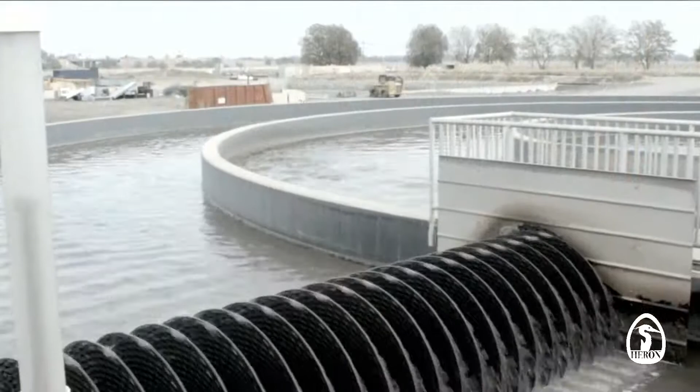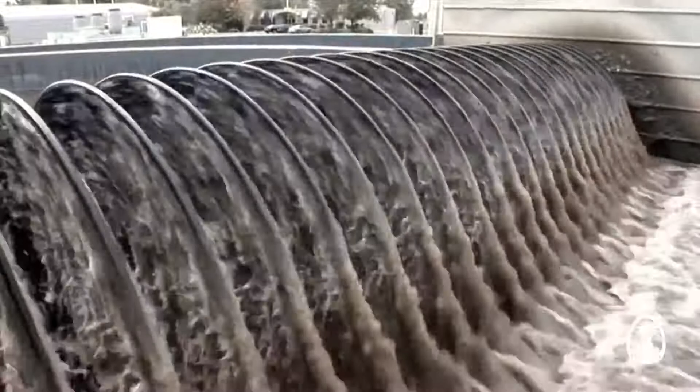What's exciting now about wastewater in the 21st century is that we're now considering it a resource. In the 20th century, it was considered a waste, and we developed treatment processes to incrementally deal with various constituents. But in the 21st century, it's become a resource. Wastewater is a renewable, recoverable source of potable water, energy, and resources. That opens up whole new vistas in our thinking about how to manage wastewater.

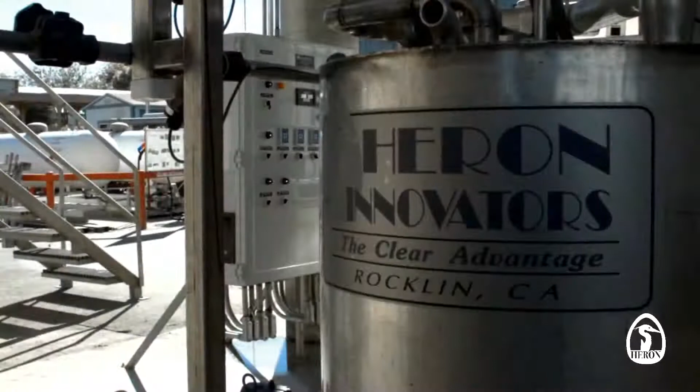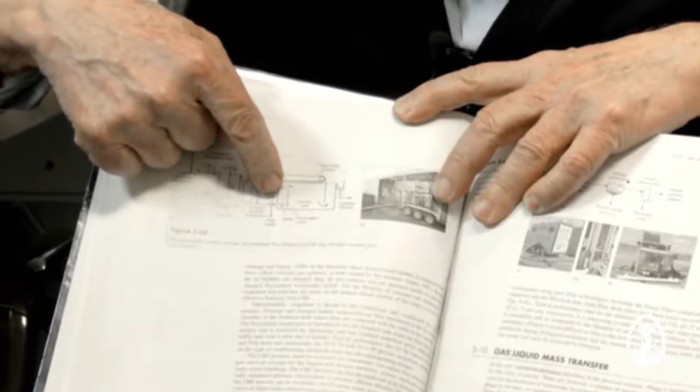Charge bubble flotation is equivalent to Heron Innovators' suspended air flotation unit. The best way to explain it is from a picture in one of my textbooks, and I'm pleased to say the 5th edition is now out. What's exciting about this is I've been able to include alternative kinds of treatment processes, including the charge bubble flotation unit. I think what Heron Innovators has done is innovate around the process.

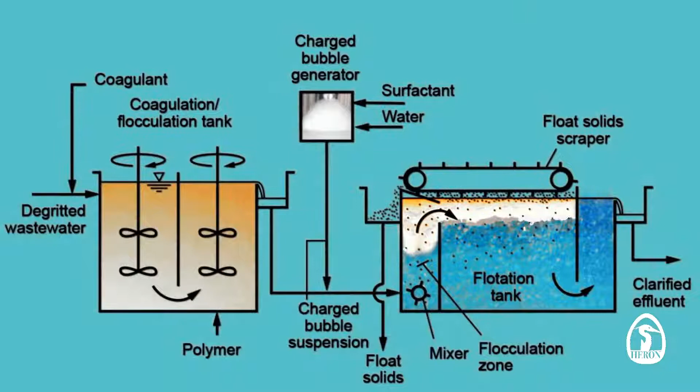One of the exciting possibilities is to think about alternative treatment process flow diagrams in which charge bubble flotation is used to precondition the wastewater before you do other types of treatment. The concept is that instead of treating wastewater the way it comes, we would modify the characteristics of the wastewater to enhance subsequent treatment.

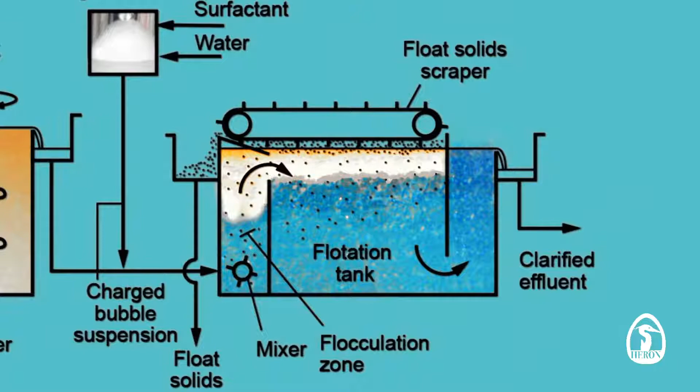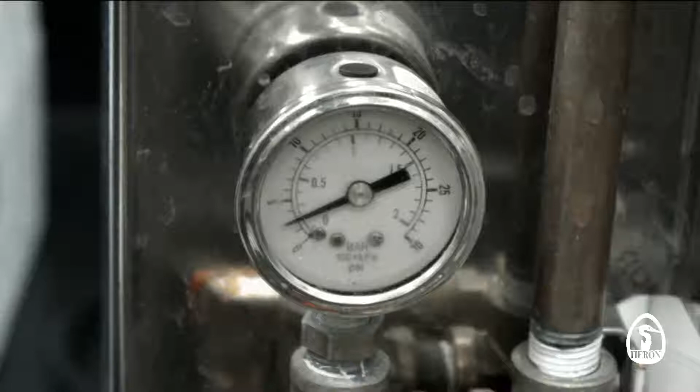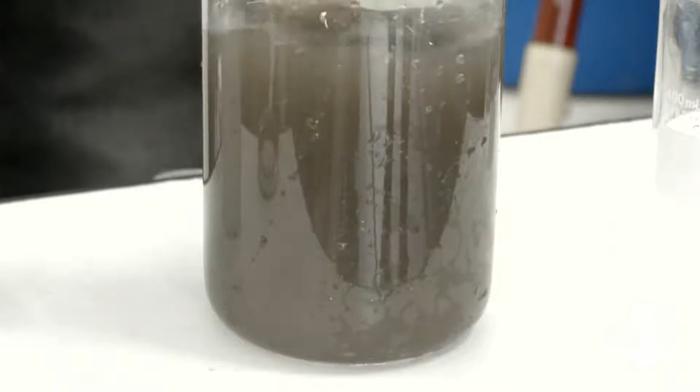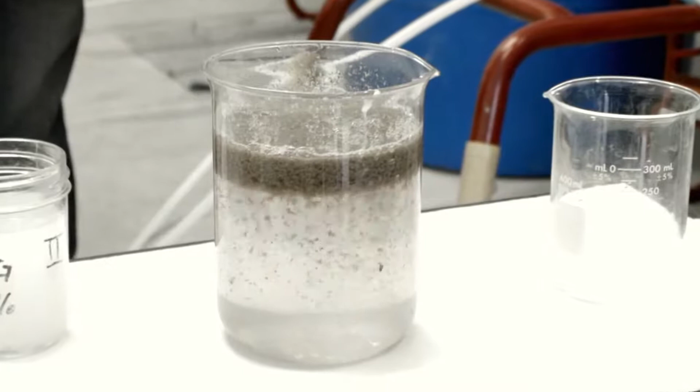We have conducted a couple of experiments. We take raw effluent and we flocculate it and condition it. Simultaneously, we generate microbubbles to which we've added a surfactant. We then mix the microbubbles that are covered with this surfactant with the flocculated wastewater. At that point, the bubbles rise to the surface carrying suspended material that they've attached to. The thickened material is removed and the underflow is the clear liquid that is then subject to additional treatment.

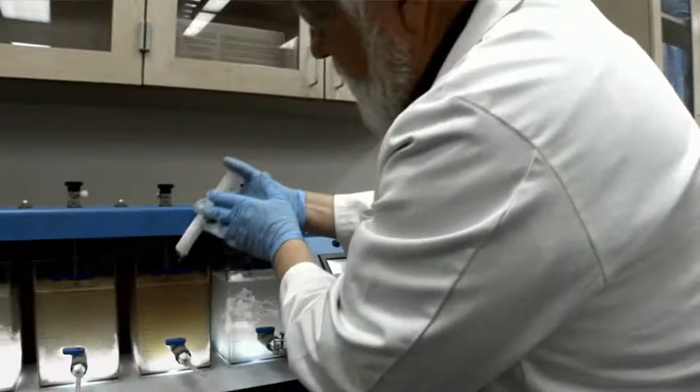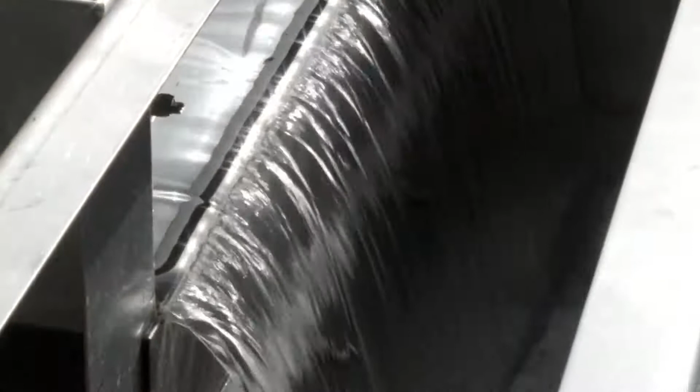This is very promising because it allows us to work over a wide range of flow rates and concentrations and achieve a uniform effluent. The interesting thing with CBF, based on our experiments, is that you also remove organic matter. As you continue to remove both suspended solids and organic matter, you get a waste that is very low in organic matter, and you can think about different types of treatment processes.

In addition, you can take the material that you've removed and use it in an anaerobic digester to produce energy. So there are a number of possibilities here, but I think that it opens up new avenues to think about secondary treatment.

So the earlier talk was about water reclamation, and that was a big deal, right? It's like we can take primary water, we can get the materials out of there, we can get the energy out of the solids, and so on and so forth. He's a huge proponent of ours, and we've worked well with him for many years. We appreciate him talking on our behalf.

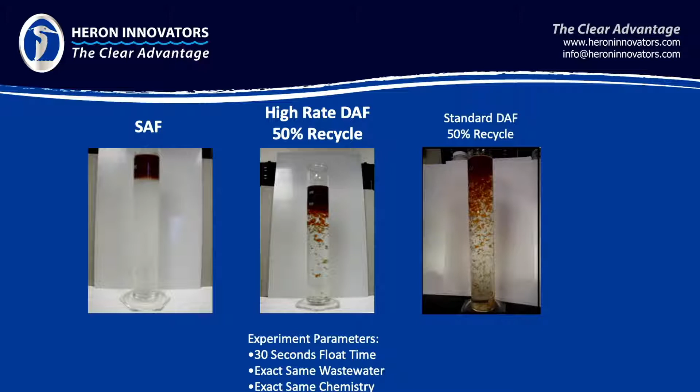You see that? Oh, they can't hear me right now.

So they can see that rise rate and how big those particles puffed up and how stable that float is. That's a testament to how well our air is used, because of those surface tension advantages I've talked about previously, how much air gets on the particle and how fast that goes up.

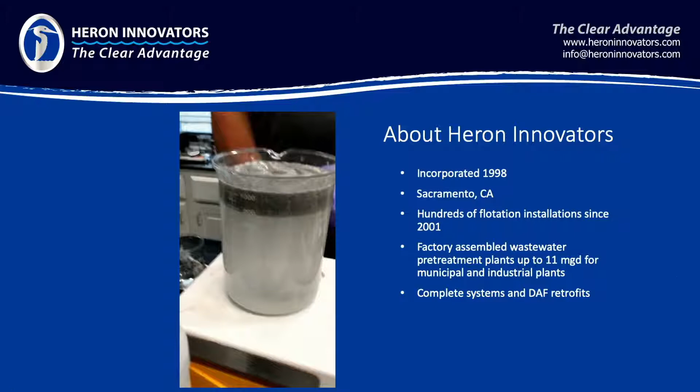So I'm going to move on. I kind of set this up for a host of eventualities, but I'll move on here. Well, let's talk about this really quick. This is our floc mixer, and there's a video on that thing. Let's get that on so you get a nice rendition of it.

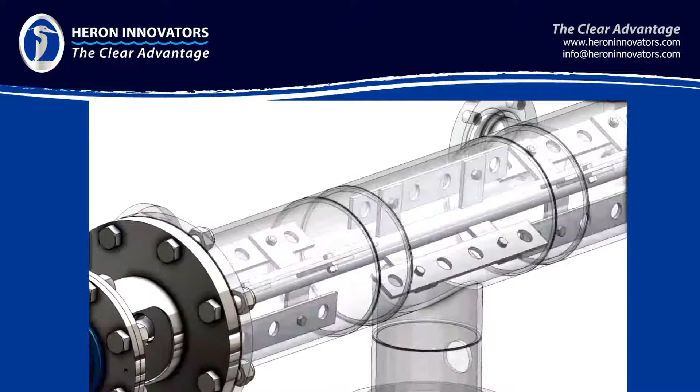So this is on the outside of our float cells, and it's incorporated into the technology. It works best in our float cell, but we can use it in a lot of system retrofits for existing DAFs. Unlike a DAF, where the air is mixed easily because there's so much water carrying it, in our case we're talking about the equivalent recycle of like 1%, and I need to mix it rapidly, which is why we need this mixer. It's the same thing we incorporate into a DAF retrofit or a DAF conversion to SAF.

We get a lot of the same advantages, maybe not quite as good as we can get on our own float cells, but it's pretty impressive—some multiple of the original design, usually 4 or 5, as much as 10 sometimes.

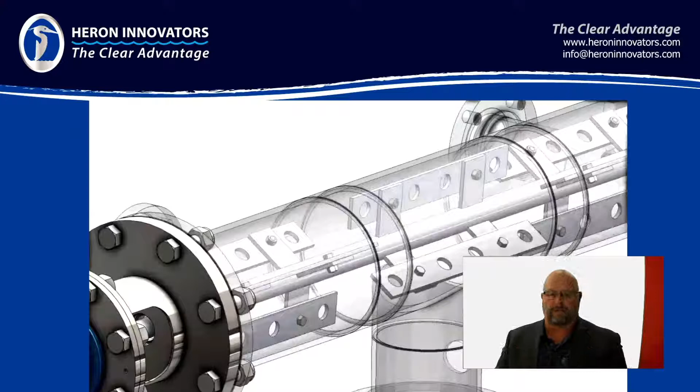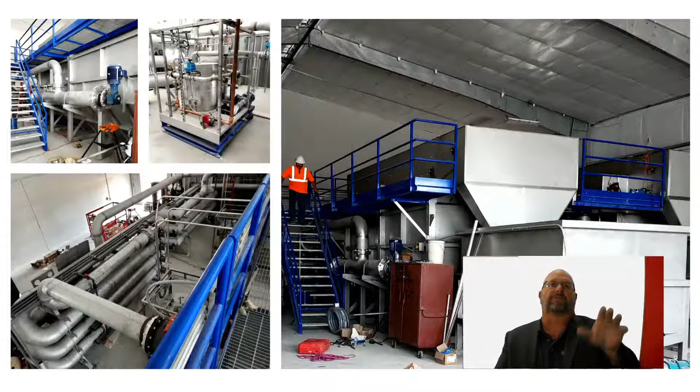This is an actual floc mixer that was being manufactured for one of our clients, and this is an actual installation where you can see the floc mixer on the top left. Let's see if I can reach that thing—right here, can you see that? And on the right is our SAF generator, which is our secret sauce.

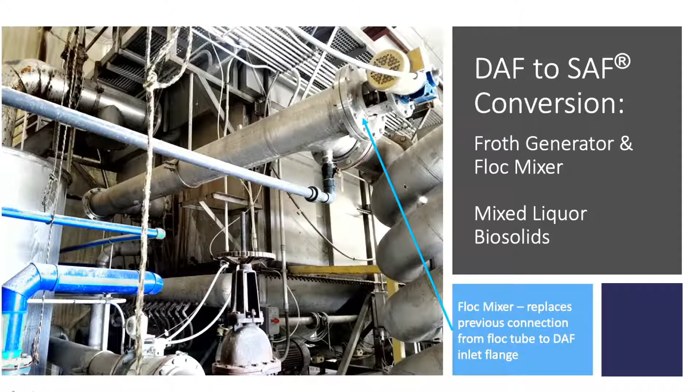This is the floc tube on an installation in Southwest City. This has got a good story. I'm having trouble with the computer here, but right here you can see there's a control cabinet for the froth generator that was utilizing this retrofit. On the top up there is the floc mixer—you can kind of see it with a motor hanging off to the right side of it.

So the water comes out of that floc tube, enters through the floc mixer—what we call the clear mixer—and goes into the float cell. All the froth is fed in; you can actually see the line if you look carefully, but it's all fed on the inlet of that mixer before it goes in. Then the froth and conditioned water continue to be mixed going through the tube all the way to the inlet of the DAF.

This DAF here was kind of challenged. They had not only a mixed liquor they were feeding from an MBBR, but they were also trying to feed the settled solids or waste activated sludge from a downstream SBR back to this fairly large DAF, which was actually spec'd for 2,500 gallons a minute. They were barely getting 1,250 gallons a minute, and just about any time they introduced any of that downstream waste activated sludge, they lost the process.

For years they were trying to manage that and had convinced themselves they had to go buy a new piece of equipment. Well, they met us—Simmons met us. You saw that jar test I showed you earlier, that came from Simmons, and they put this in. Andy there, in the background in the black shirt, will tell you that before we even got up the stairs, this was working, and they're tripling the solids loading today, nowhere near capacity.

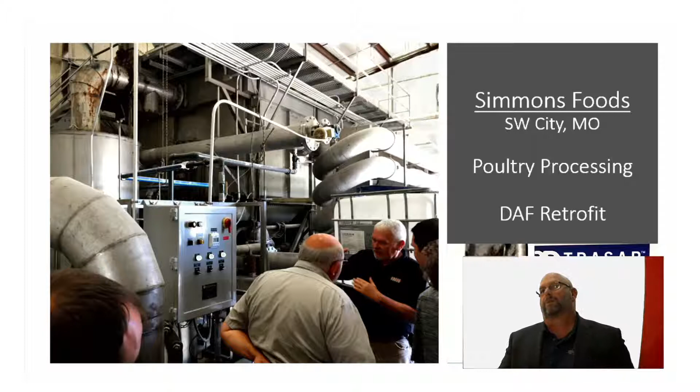It's about 3 times what they were able to get before, and they still have all kinds of capacity available.

The next slide shows a little video down on the bottom right. I'll run this so you can see the clarity of the water. That's actually a reading off the turbidimeter, showing a turbidity of about 0.1. You can see the clarity of that water - it's very clear, very low turbidity. I don't know that they're always at 0.1, but they're always way down in turbidity, and they've still got all kinds of capacity left in that operation today.

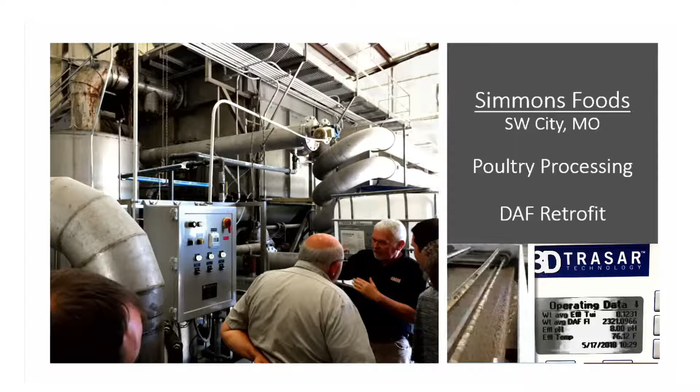I remember the vice president of engineering, after we put our first installation in at another plant, kept coming back to us saying, 'but you said you could do this on this other one,' almost like a dare. They couldn't be happier today.

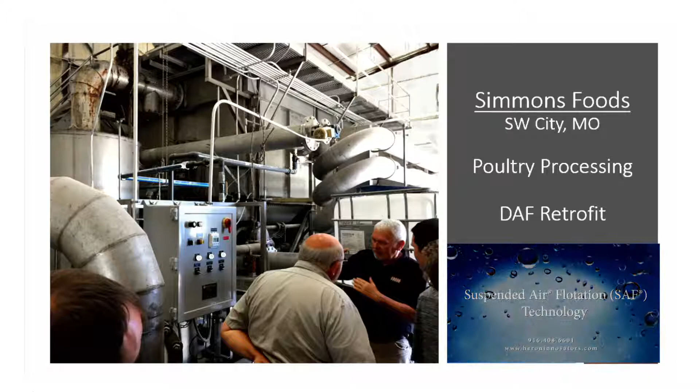All right, I need to get to the next slide. That one we just saw, so we're going to move on.

This is also an industrial setting - this is poultry, and these are large units. There's a good story to go with this.

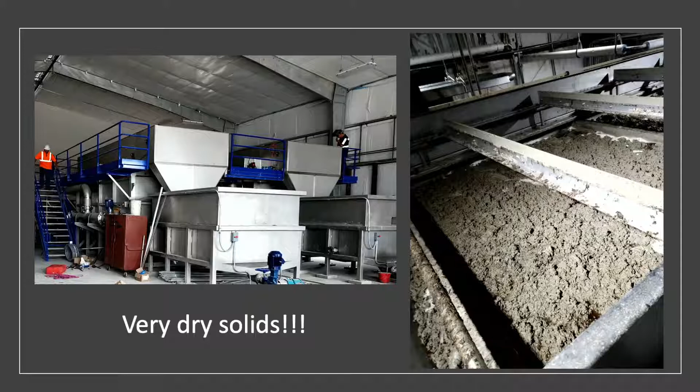They're making great water. The original intent was to come into the primary unit, go into one of our SAFs, then from that SAF go to a biological reactor, and then have the secondary SAF remove the biomass before it discharged to the city.

For months on startup, they never actually ran the biological process - they figured out they could meet their numbers just by going into the 1 million gallon, 1 day retention EQ tank. They ran like that for about 6 months, never turning on the aerators underneath. Well, what ended up happening is the bottom started filling up with solids. So in an interesting note, one day they turned the air on and threw a bunch of solids into solution that would have accumulated on the bottom.

At one point they were running that 140 square foot cell at 2,400 gallons a minute, at 36 pounds per hour per square foot loading.

It was an amazing performance, and the operator, Andy, who's the chief operator out there, said, 'we would go harder, but the pumps can't put out any more - I know this can do at least another 10-20%,' because the water was still crystal clear. So we were easily over 2,800 gallons a minute, or 20 gallons per minute per square foot loading, in that water.

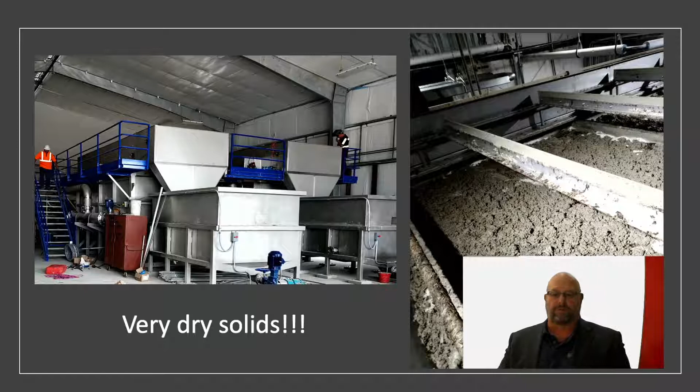Then we do a lot in solids thickening, both industrial and municipal.

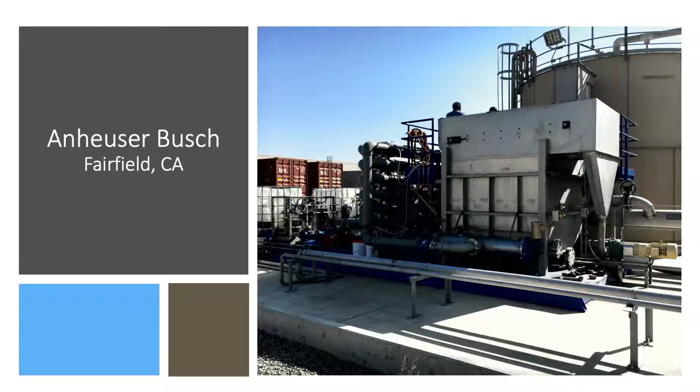This is one of our installations that was dealing with anaerobic digested sludge. We were told we were the best performing DAF in North America. We were in a world where everyone was hoping for 70% removal - we averaged 98% removal consistently. And that 1 million gallon a day unit, with everything on it - all the day tanks and all the working tanks - is only 28 feet long and 10 feet wide.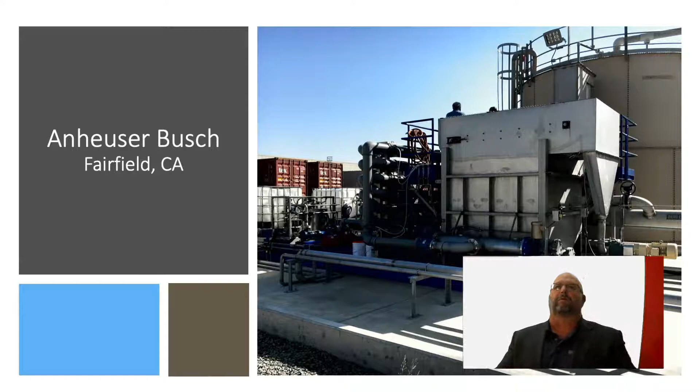Another example - we had a trailer up in Minnesota treating, again, anaerobic sludge, and that's just recently. We were competing head-to-head with a DAF competitor, and we were achieving all those same results I've been talking about earlier. We went as high as 46 pounds per hour per square foot loading, almost always above 99% removal, at about half the chemistry of the competing technology.

Most of those parameters, but the loading rate was really a significant parameter that we excelled on, with the fact that we were able to do it at a fraction of the polymer loading that they would have to do if they were going to use a DAF.

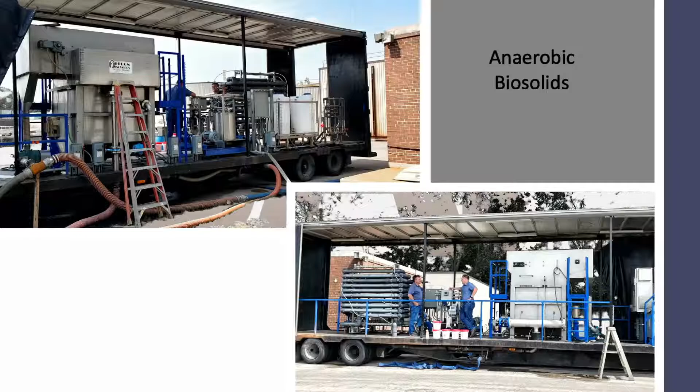All right, let's see, I've got a few more slides here. Let's make our way. Here's another slide showing that same installation.

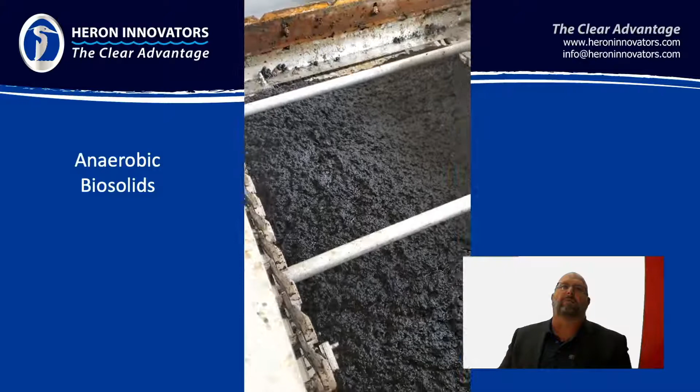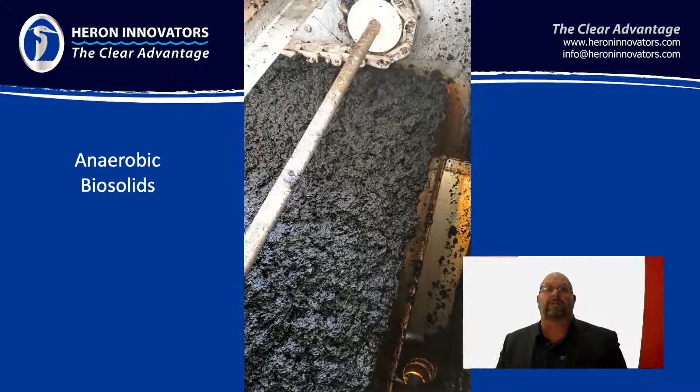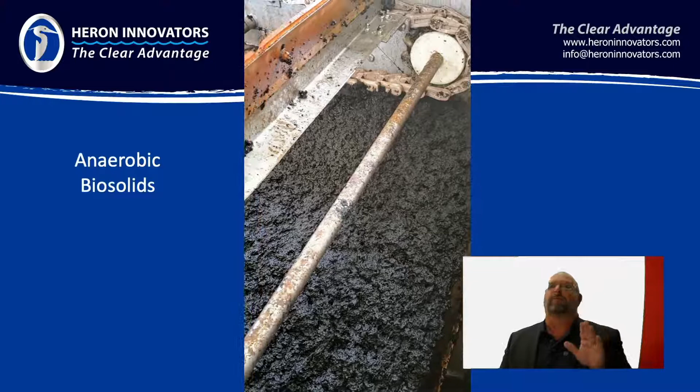Here's the solids, and this is actually a video. What you can't see here is the flight is actually buried in those solids, about an 8-inch deep flight. So when this comes on, remember, we're still doing 98%, 99% removal in the water, and we've never gone much below 29 or 30 pounds per hour per square foot, but we've achieved as high as 46 pounds per hour per square foot in this application. You can see that in the solids coming off.

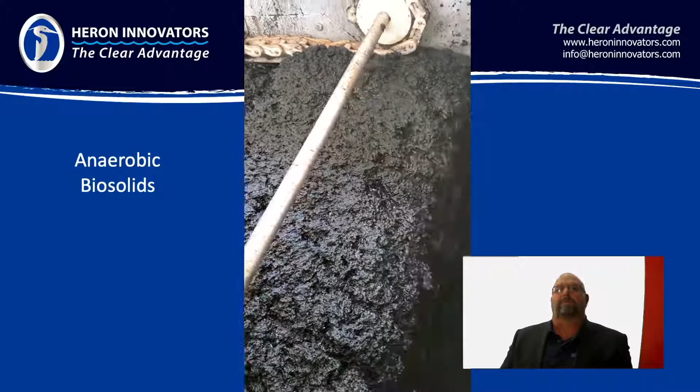And those solids were generally between 5 and 6%. I'll let that go ahead and run for a little bit. Just inches of solid slide. Here comes the blade, the 8-inch blade that's buried. There you go. Okay, let's go on to the next slide.

The next slide is another thing we do, another water we treat particularly well is water with algae in it. We have examples where we've done it for primary water where they're actually using algae to aerate the stream to go into the secondary process.

In those applications, we're seeing 400 to 600 parts per million algae, and we're treating it down to less than 2 NTU. What you're looking at in front of you is a water reclamation application at a prison here in California, and they're selling it for irrigation to agricultural concerns around the plant.

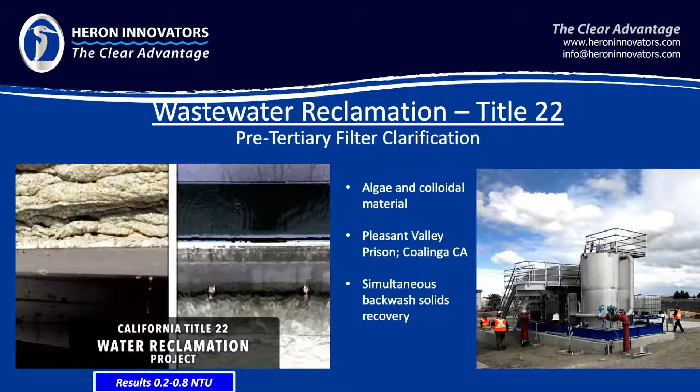So we're achieving 0.2 to 0.8 NTU from water that's coming in at 60 to 100 NTU. We're easily getting to 7 to 10% solids, which is unique compared to our competing approaches, which look at 2% as being a really good number. The fact that we can get so high means a lot less water you have to haul off. And it's such a robust solid that it dewaters well in downstream dewatering.

This solid goes into a lined baker box. It continues dewatering, then gets disposed of as a solid meeting the paint filter test.

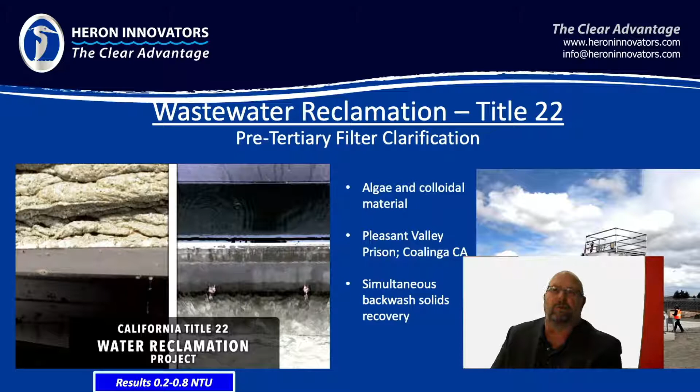Next is Graton Community Services District. I'm going to move this over. It's going to be another video, and that video talks about one of our first Title 22 algae wastewater reclamation projects.

I serve the District of Graton as their general manager. I'm a contract general manager. I've worked in the field 37 years. Graton is a unique environment. It's got beautiful wildlife resources, and it had been run down by the previous management. The people of Graton decided to take over and form their own special district and revitalize it.

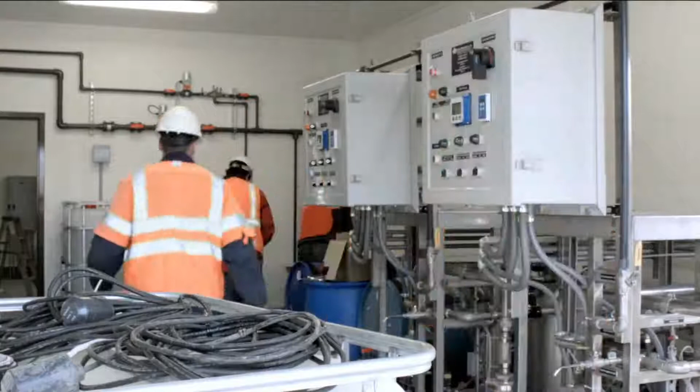They inherited some problems, one of which is Graton would not be allowed to continue to discharge into the Atascadero Creek. We actually conducted a pilot study here at Graton, full scale, and proved to the state that we could get the required removal of algae and bacteria from the water with a SAF, getting turbidities down to the 1.0 range or lower.

Pete Lescure and I were working with the district to try to find alternatives to going to this activated sludge or regional system. As lead designers on this Graton wastewater project, I was convinced from the viewpoint of the principles that whereas a DAF has to backtrack and recycle 50% of what you're trying to produce, the SAF only has to use 2% of that flow.

That means a whole lot less pumping you're doing, a whole lot less material handling you're doing, smaller pipes to deal with, etc.

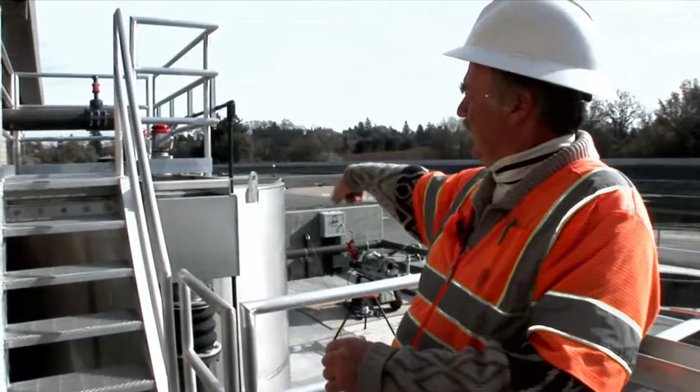The SAF unit takes water from our ponds and adds coagulant to it in this mixing tank and conveys it to the bottom of this SAF unit, where a surfactant and air are entrained and cause the algae and bacteria to float to the surface.

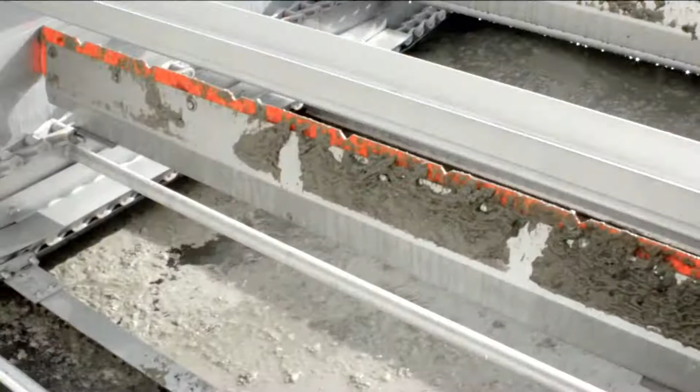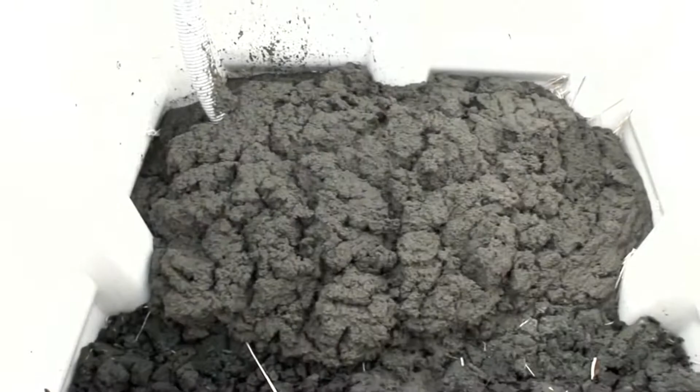When they get to the surface, they're collected by this scraper and carried all the way to the end of the SAF unit, where they are brought up on a beach. The water drains off and the solids fall into a bin. The bin is then dewatered by gravity and it is composted.

People don't always want something new. Do we need to continue with things that were developed in 1914 that are shown to be less efficient than things that are now available in industry? I believe not, and we'd like to show them it's okay.

So in this application, those solids, which are municipal waste solids basically, are composted and then land applied. So it offers another option for how to reintroduce these solids as a piece of sustainability.

All right, so I got a couple more slides here. A lot of sewer plants and other plants have to divert water in high water situations to some sort of equalization basin where the water actually gets dirtier, right? You've got primary solids in there, and then algae and silt get suspended in the water, and then it needs to be treated, and the downstream process doesn't serve for that very well. It doesn't accept that algae very well.

So we are asked to pre-treat before that water is reintroduced, and here's a short video on that right now.

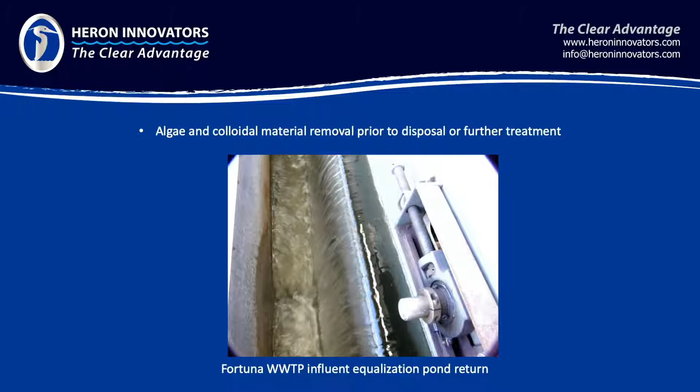All right, sorry, but I have a second one here that's almost as good. So let's go here and let's look at this. There we go.

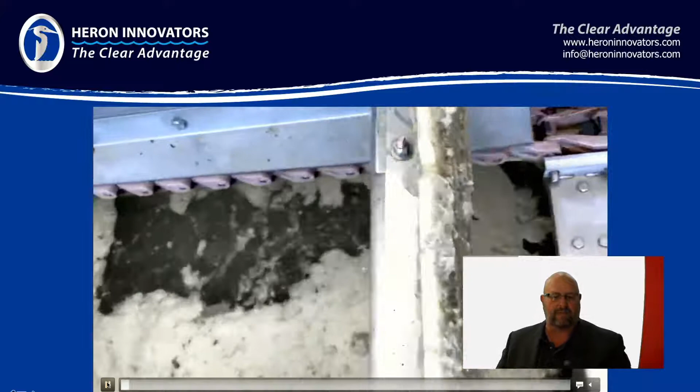So this is primary wastewater that's been diverted into the EQ basin and then treated before it gets reintroduced into the plant.

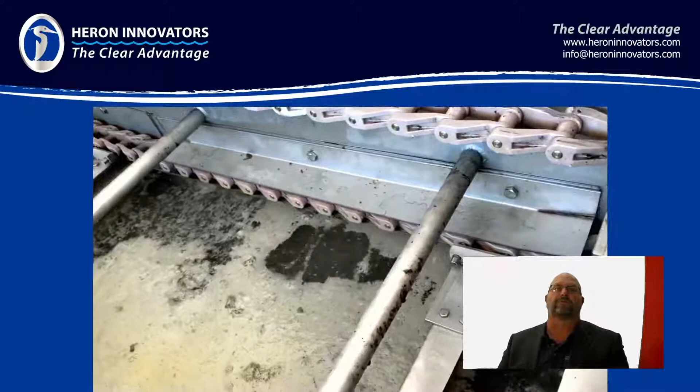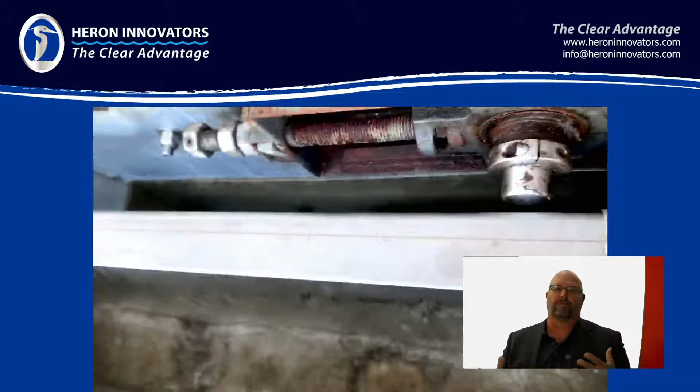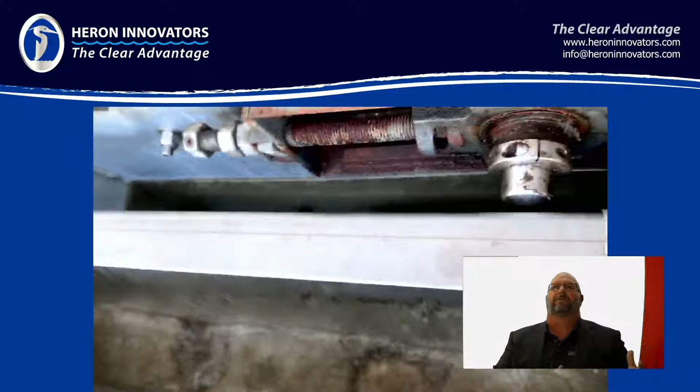Okay, so that's my last slide. I think that's enough to demonstrate what we can do in really heavily contaminated water and lightly contaminated water, different medias, algae, digester solids. We seem to be very good at solids removal in just about every application we come across where DAF previously had an application, or any kind of high rate clarification is needed.

Okay, so we do have a question. I'm going to, yes, thank you. Andrea, take it from here for a second. So our question right now is, have you ever met a client that's actually dissuaded from buying SAF because it sounds too good to be true?

Yeah, so Andrew, that was the rule when I started this company, right? We would come in and just about any metric you could apply to DAF, we were saying we could do not just a little bit better. And so it was too good to be true, no one could believe it. Now with these hundreds of projects online and there's this pretty good install base, there's a lot of evidence of that, and it's getting to be less of a problem. But still, engineers are really slow to accept that kind of statement, they're very skeptical because it does, if this is the first time you heard about SAF, sound too good to be true. And it is something that we strive to overcome often.

Yeah, I have to say that your results are unbelievable. If I hadn't seen them with my own two eyes, I would question some of the things that you're saying as well. But there's always time to ask us questions and let us talk to you and show you how we can improve your results and make everything run a little bit smoother and more effectively.